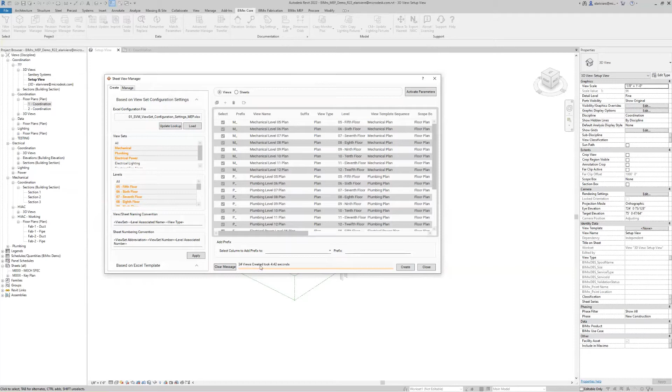I'm going to click create, and if we follow across the bottom, you'll see it created 24 views in only a few seconds. Now, I don't want to just stop with those views, because for each of those views we just made, I'm also going to need to have a sheet as well. So if we jump to sheets, we'll see all of those sheets ready to be created from the same views, the same trades, the same floors, ready to go. And just like that, I can create those 24 sheets.

Now, I'd like everyone to think, as I'm doing each of these steps, about the manual process or your current process for creating these things. It's a lot of right-clicking, duplicating, creating new, and renaming. It's an incredibly lengthy process. Now, I'm going to close this out, and let's go ahead and open up one of those views so we can see something that's about to happen.

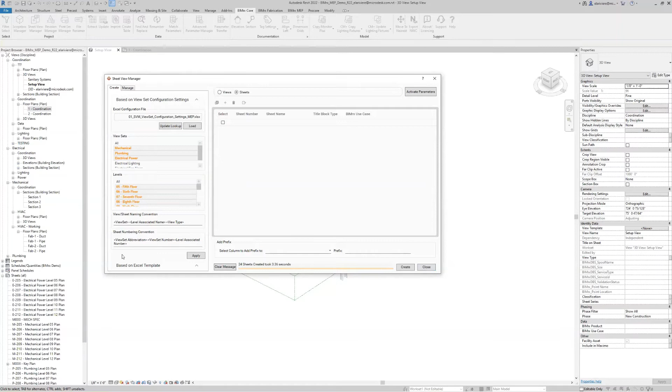Now, expanding out those HVAC floor plans, we see all of those tower views I just created. So jumping back to the Sheet View Manager, I don't want to just create overall plans. Really what I need is those individual tower plans, because there are two towers, not one giant floor.

So we can use another Excel-based workflow to duplicate those views for me. Loading in that view duplication Excel sheet, I've set it up for an A and B plan for each of the levels, giving me a tower scope box for each. We're not doing a view template because we're able to do this as duplicate as dependent. Think of the manual workflow of right-clicking, duplicate as dependent, renaming, and applying all of these different values for each view. I'm going to click create right now.

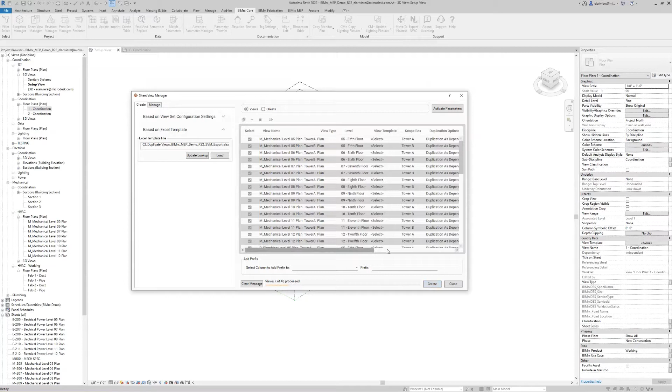And as we watch across the bottom, it's processing about 48 views in under 10 seconds, 6.21 seconds. Incredibly, incredibly fast.

Again, I don't want to just stop here. We've made them, we've got them duplicated, but I think we can do a little bit better. I think we can also place these views onto our sheets. So jumping in here, I'm going to click load and pull open a view placement Excel file as well. Taking a look at the placement Excel file, I have each of those plans called out, the towers I want on those plans, and I'm even giving them a location so each individual one will look the same. I'm going to click create, and let's talk a bit more about what's going on here.

I've set that placement location up so that each sheet will be exactly the same, and not just each sheet, but each trade within the model. Because this is an Excel-based workflow, even if we had multiple models, we could use these same Excel files, loading them into multiple projects, using them over and over to have perfect consistency across all of our trades. It's a very nice thing to have, and we're not doing anything extra. It just works that way.

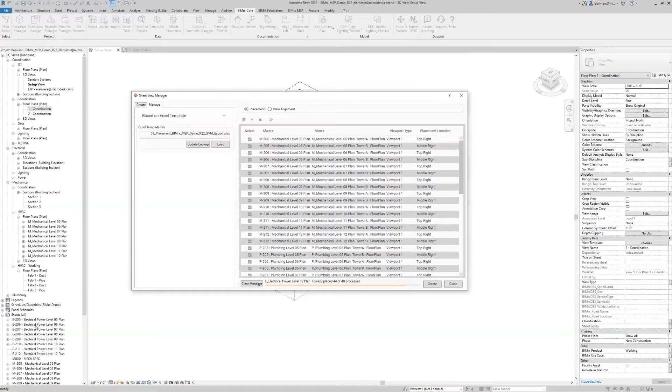Again, think about the manual process for doing these things. We would have to open each of these views up, drag and drop each of the two views we want on that sheet, and then manually align them to where we want them to be. It's an incredibly time-consuming process that BIMrx Core was able to handle in 43 seconds.

I'm going to click close and let's take a look at one of those sheets. And there we have it, those two views sitting right on the right-hand side, just like we asked it to place them. A very nice looking view. This is absolutely something that we could issue.

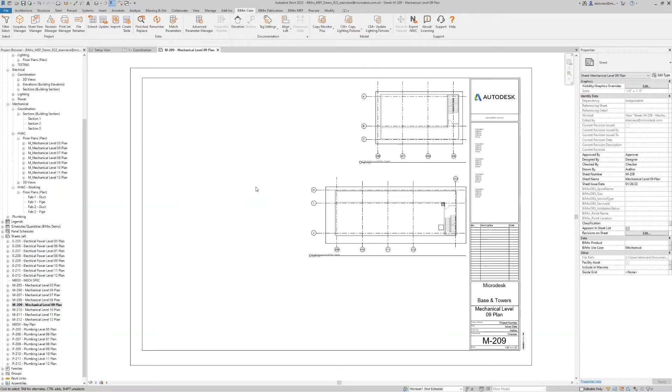So once I've set my project up, I don't really need that setup stuff anymore. I could issue a whole suite of drawings right now. But I think what I really need to do is jump in here and do a little bit more modeling. Not quite done with my modeling yet, need to do a little bit more of that first.

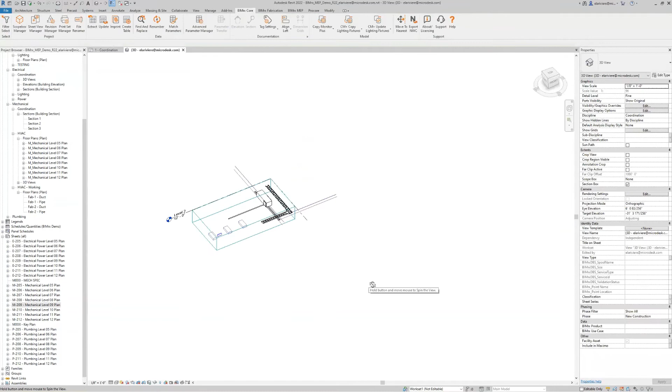So let's take a look at some of the new modeling things that we brought in with BIMrx version 3.1. Just like all the other versions, we can go ahead and work almost entirely from a 3D view. I'm going to tile these together so we can see what's happening in 2D and 3D at the same exact time. I'm going to use the bloom command on this piece of equipment over here to give me extensions that I can work from on all sides.

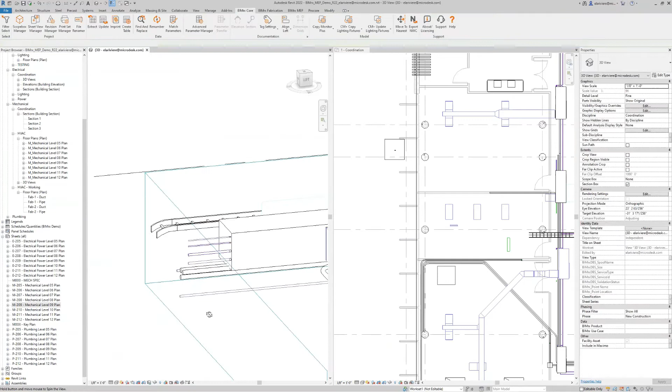We'll notice it's giving me an extension out for each of those pipes on the left there, giving me something to work with, hydronic supplies and returns from both of these, as well as giving me that sanitary kick on the other side and those two supply and returns.

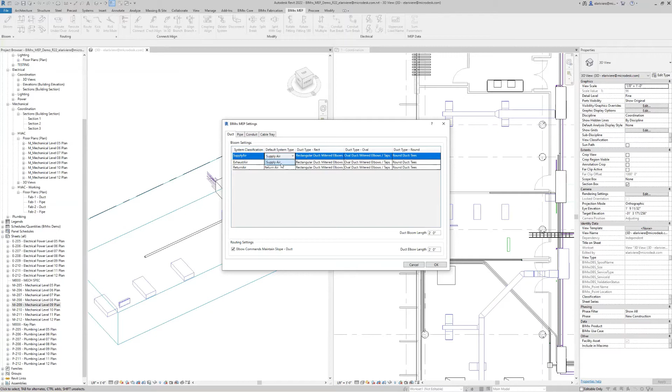Now, a really cool feature we've just added: if we go take a look at BIMrx MEP and open up the bloom, we can actually specify different system types if we want to. So if I don't want it to default to using miter, I can ask it to use something else instead. If I don't want to have it using supply air and I had another system available, I can do that. We'll see later when we start working with pipe work, maybe we'll want to change the sanitary around. So just remember this exists.

We also have the ability, if you'd like to change the extension length, to do so — you're not always getting 2-foot extensions. You can make that extension length whatever you would like it to be.

So I've got that 2-foot extension coming out. Maybe I want to go to 2D to drag this over, or maybe I want to do it in 3D. It's really up to me. But I'm just giving myself a little bit of a workspace to work with. Now I'd like to show you some cool things we have in here.

Let's say I need to connect all of these items together. Let's take a look at some of the commands that will allow me to do that. I have the align branch command. It's going to allow me to bring all of these up to the same height, and then I can very quickly bring them together.

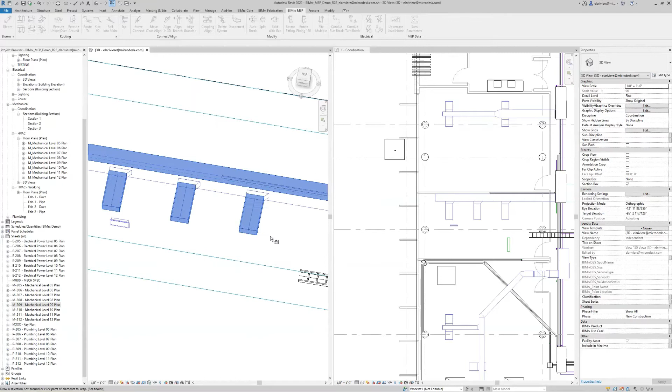If we go take a look up top, I've got align branch. I can choose my main, then my run, and it's going to bring it right up. I could absolutely keyboard shortcut these if I wanted to make it even quicker. So using that align branch command to bring all of these up, and then using the trim extend built into Revit to connect them all together, takes a couple seconds, and that's all good to go.

Now, an extra cool thing - even if those boots had come in the wrong direction, BIMrx MEP also has a flip multiple command, so we could flip these all at the same time, no more going one by one to make that happen. So I'm going to do another thing that's typically unheard of in a 3D view and make some copies of elements. I'm also going to wildly rotate this one with zero regard for what it's going to connect to, because I know BIMrx MEP is going to allow it to connect anyway.

So what am I talking about? I'm talking about the move connect commands. So I can use move connect to bring these items together and immediately get them connected. You'll notice tabbing through, it shows that full connection. Use move connect again on this middle item here, bring that through, you'll see it's inheriting systems and everything. These are real connections.

Now, what about that rotated one? Well, I can use move connect align to tell it, get rid of that rotation, rotate it so it connects properly, and we're good to go.

Incredibly fast. Now, in a little bit, we're going to take a look at some of the elbow commands as seen up here in a couple higher stakes situations. But I do want to remind you that all the commands we're viewing work on everything. So we can use the elbow commands on ductwork. We can use the move connect commands on conduit. It doesn't matter - these are all universal commands.

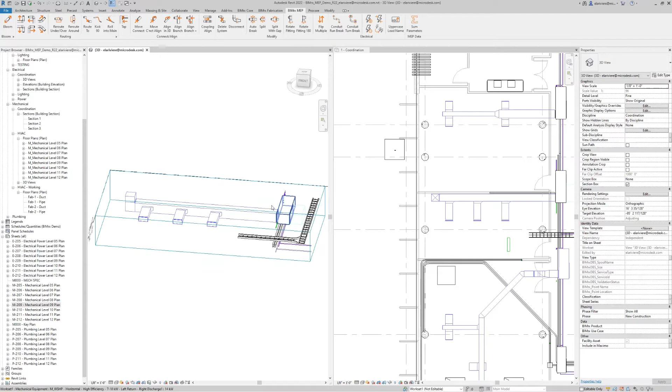So we've seen a little bit of that move connecting. We've seen a little bit of that bloom. Let's go ahead and take a look at some of the other nifty commands we've got. I'm jumping up here into this space - let's go take a look at what we can do up here.

Now, what I'm seeing is some stuff that's disconnected that probably shouldn't be, and some stuff that's clashing that probably shouldn't be. And if we look underground, we'll see some underground conduit that needs to get above ground. Let's go ahead and see how we can solve all of these problems.

So zooming into this central portion here, let's go ahead and take a look at the route to command. Now, route to has been updated to make it even easier to connect multiple items together. So what I'm going to do here is display a typical design option workflow. Maybe I want to try out a few different bends to see which one's going to look the nicest when I actually go ahead and run these things together.

And if it turns out I like 15 the most, awesome. I'm going to hit escape. I can control Z, Z, Z, get back to all of those things. And I can use route to again - that's going to maintain that 15 for me. And now I can just give all of these that 15 degrees.

Makes it very easy to try out multiple options and still know that you can connect them together very quickly afterwards. Now, we got that connected, but if we continue to follow this run, it just kind of ends.

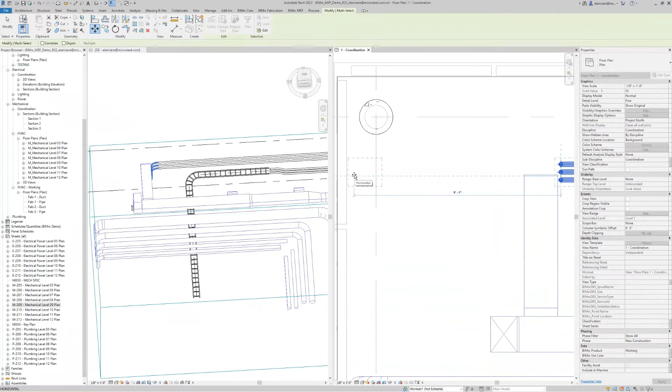And why don't we go ahead and take a look at 2D? I'm going to show you one of my favorite things to do with these elbow commands. I'm a huge fan of using the elbow down command in a 2D view to just drop my conduit, drop my pipe, drop my ductwork right where it stands. And then I can use the built-in move commands to move these right up against whatever wall or other item it is that I'm working with. Makes it very, very easy to model and coordinate in those 2D and 3D spaces.

So we'll see those sitting over here to the left.

If we take a look and rotate around, we'll notice that underground pipe isn't really lined up. So we're actually going to have to do a 90 over, and then we're going to have to bend up to connect.

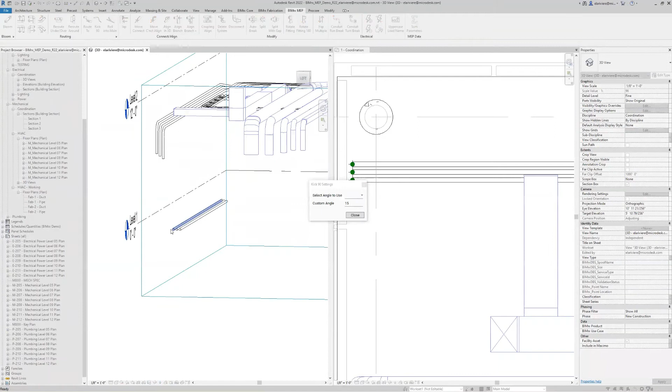Well, that is a built-in command with BIMrx MEP. We have this nifty kick 90 command that'll take care of this for us. So let's choose kick 90. All I need to do is choose the element that's going to have the bend, and click that. We'll see it's using that same 15 degrees from earlier. That angle works, so I'm going to just continue to use it.

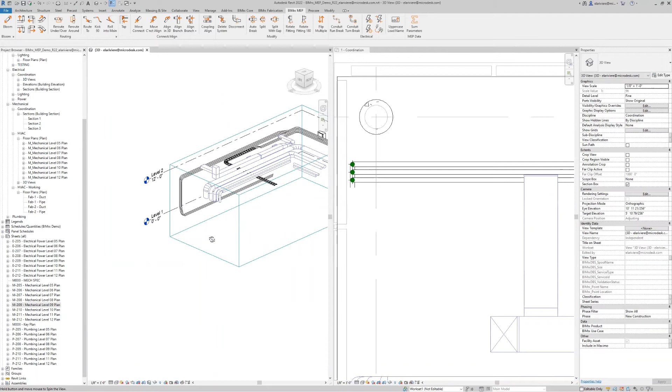Like we saw, I can just click item after item, and it's going to make that connection for me. Hitting escape when I'm done closes out of the command, and I can continue doing whatever it is I want to do. We're making it very easy to connect these elements together.

Now let's take a look at a couple other things we might need to do real quick. Let's clear a couple clashes. If we take a look over here, maybe it's not so easy to see where the clash is in 3D, so why don't I take care of it in 2D instead. I see there's something going on over here, and I'd really like to route all of these around and just not worry about it. So what can I do?

If I take a look, I can go ahead and use this reroute around command. I'm actually going to use the pre-select option here. Go to MEP, we're going to use the reroute around, and that's going to allow me - I'm going to use a 45 degree here - to push all those back.

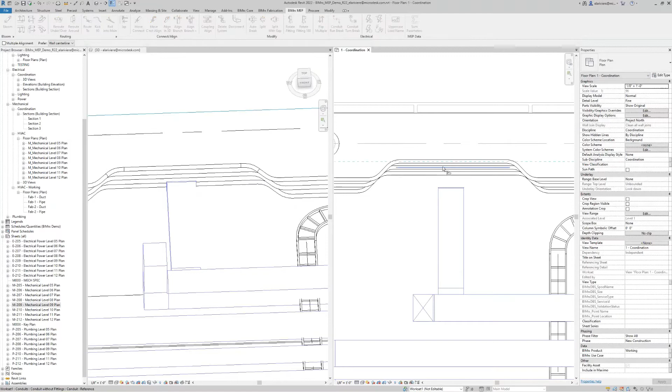I can then use the align command to just make it look a little bit cleaner, line all those up against a flat over there. Maybe they're up against a wall, something else, doesn't matter. And then they can break out and turn down after, right? Whatever you need to do, we're making it easier to do it.

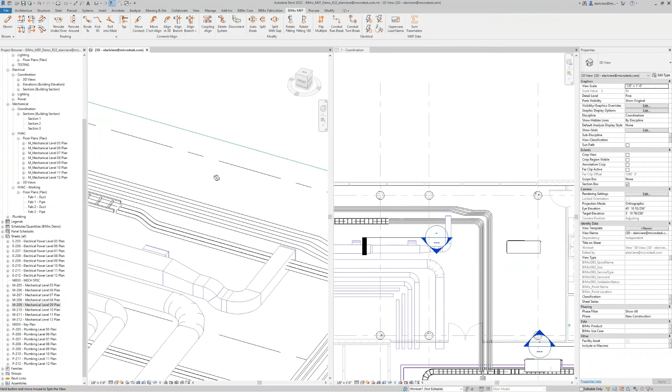Now that's getting us around something. What about if we need to get underneath something? Again, these all work in 2D or in 3D, whatever is going to be easiest for you. So why don't I do this one in 3D. I'm going to grab all of these conduit right here that need to get underneath that ductwork. We're going to jump right over to MEP, and we're going to use over under instead. I'm going to choose something on the left, something on the right, and I'm going to choose a bend that I think is going to work. I'm thinking 30 degrees sounds pretty good to me.

I'm going to click OK, and we should see it bend directly underneath. All it takes is a couple seconds. If I want to try something else, just like before, we can undo it and test out a few different design options. With all of these commands being this quick, this speedy, we can really dive into the design and not worry too much about the actual connections we're trying to make.

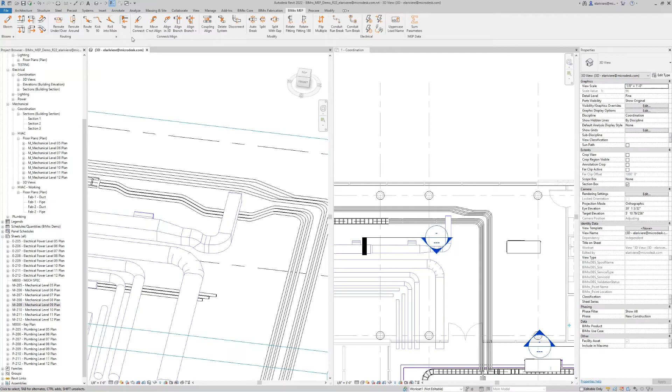So we've seen some cool routing, we've seen some cool stuff over here, but I'd like to show you something even cooler. Now, I think personally, my biggest bane when it comes to modeling is dealing with sanitary systems. So why don't we go take a look at how we can speed up some of this sanitary modeling? Let's do something cool, right? Let's do something extra cool.

So I mentioned before we have some new additions to Bloom. Well, let's go ahead and take a look at what those bloom additions are doing. If I bloom out that piece of sanitary, we'll see that it's giving me a standard sanitary extension, even though I'm actually attempting to use drainage systems instead. So what I would actually like to do is undo that bloom.

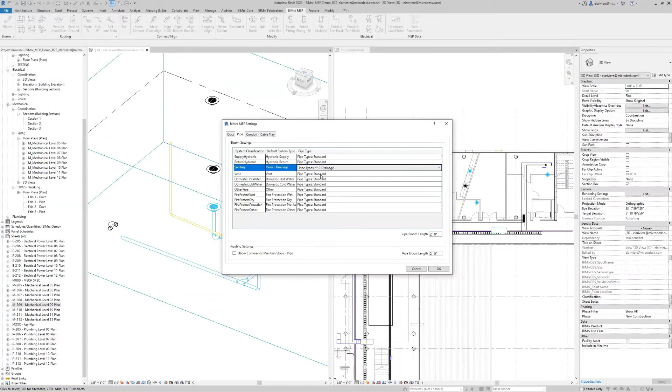And let's go take a look at some of the bloom settings, because I could actually tell my pipe, you know what, I actually want you to use plumbing drainage, and I'd actually like it if you use the P drainage pipe type. So now when I bloom this, it's actually going to give me the correct information. I can then use that move connect align we saw earlier to just bring my P-trap over, and it works.

I can then even bloom my P-trap out. And using one of the newer features to BIMrx, I can now pre-select when I go to use rotate fitting, and I can rotate an entire chunk of stuff all at the same time. So let's go use that rotate fitting command, choosing up here. And if I give this a 90-degree rotation, we'll see that it pops it over. I have RF keyboard shortcutted for rotate fitting.

And if you go the wrong way, it's that simple to just flip it the other direction, right? We can do entire chunks at a time. It's really awesome stuff. And what do I mean by entire chunks? Well, we'll see soon enough.

Now, continuing on with these workflows, what do I really need to do here? I need to finish up the rest of this run and give these things something to connect into. So what am I looking at down here? I'd probably like these to connect to the flat. So what do I need to do here? I need this to lower down to the correct height to connect together. We take a look, it's floating a little bit high.

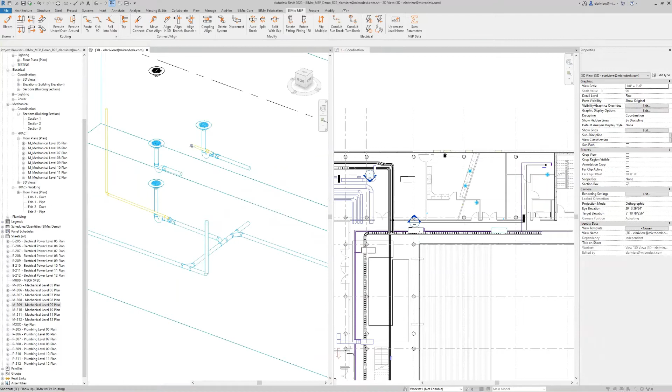Now I'm going to show you something extra cool. I can go ahead and elbow up this, and I'm going to elbow right it, or elbow left it as well. Now it's extra cool. Using the new command we have here, when we use align branch, we can actually do a pre-select of align branch. So when I grab this entire chunk of stuff, and now I go up to MEP and I use the align branch command, and I choose the main down here and I choose this branch here, you'll notice it moved it all as a group. So we can actually align groups of elements, not just a single element.

Now I'm going to undo this, and I'm going to use align branch with just these two elements. And I'd like you to see that that vertical piece is going to stay exactly where it is currently if we don't do the pre-select. So again, going up to that align branch, choosing the main down here, choosing that run, you'll see it does an extension right here instead. We're giving you as many opportunities to design what you need to design as possible.

So now that I've brought those down to an acceptable height, I can use trim to bring them together. I can go ahead and grab that fitting, extend it out. I'm going to bloom this one as well. I'm going to give it an elbow up, and there's my cleanup. That was incredibly easy, right?

Incredibly easy. Now, same thing I can do over here. I want to get these connected. Well, align my branch together, bring it down, and I can connect them. But wait, Ed, you never put a slope on that. You're right, I didn't. Well, if we use align branch plus, we can cause it to inherit the slope for us. And it now has that 1/8 inch slope. So when I go ahead and do that connection, it is sloping in and everything is fine and dandy, right?

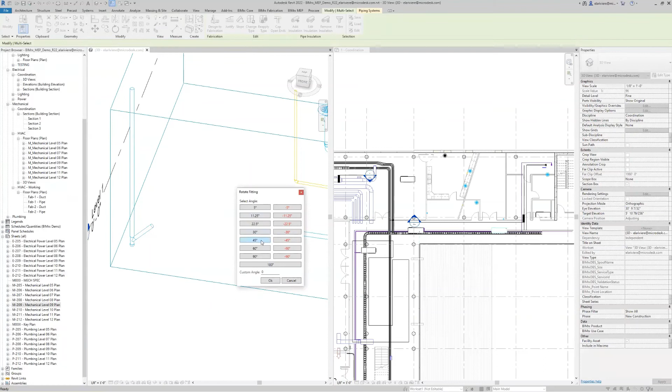Really nifty stuff. Now, let's see some other things we might need to do here. I've got more of this system to connect together. How else could we string some of these commands? If we take a look down here in the bottom left, I've got this little riser coming up off my main. Well, I could grab that. I can use rotate fitting here to come across the item over here. Maybe I want to rotate these down 45 degrees. I'm doing a 45-degree rotation here so that when these come together, I get that 45-degree bend dropping in. Now, what's incredibly tough to do is to move this vertically to line up with this so they actually make that connection.

Well, just like we did over here, align branch pre-select is an incredibly powerful command. And it's going to allow me to grab this entire chunk of elements. And when I go ahead and I do this BIMrx MEP align branch, and I choose my branch and I choose this to align up to it, you'll notice it moved only in the Z axis. We are not editing any other axes, and it's moving it as a chunk so it all moves together, allowing me to create that perfect trim to corner connection with no issues whatsoever, right? Really awesome stuff, really powerful stuff.

Now, let's keep going with it. I'm going to go ahead and drop down an extension over here. I'm going to make a copy of this little chunk of stuff over here. I'm going to move it kind of close, I don't know, because I don't care. I'm going to go ahead and let move connect and bring these together.

Once those are brought together, I'm going to grab that chunk of stuff. I'm going to use rotate fitting on it. I'm going to bring it around 90 degrees. I'm going to go ahead and bloom that extension out. We'll notice because the other part was already sloped, we're getting that 1/8 inch slope over here as well. We take a look, that one's sitting a little bit above. Now I'm going to lift it even higher above.

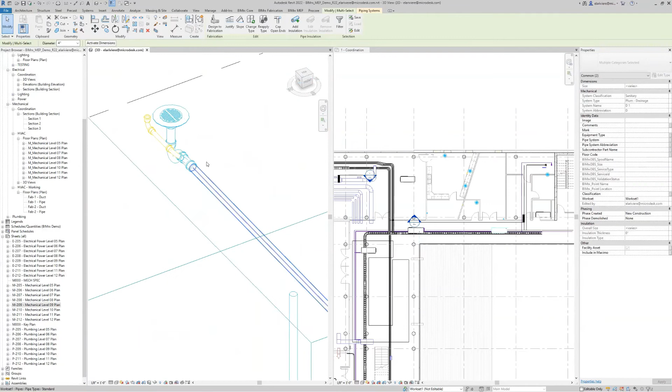Again, I can grab this entire chunk of stuff over here and use Align Branch Plus to bring the entire thing down to exactly where I need it—rather, Align Branch Normal. Line those up, and then I can use Trim to Corner to bring these back together again. And I have a rolling offset with a 45-degree bend.

We can make some incredibly complex shapes with only a few button clicks. It makes it that much easier to work with all of these elements.

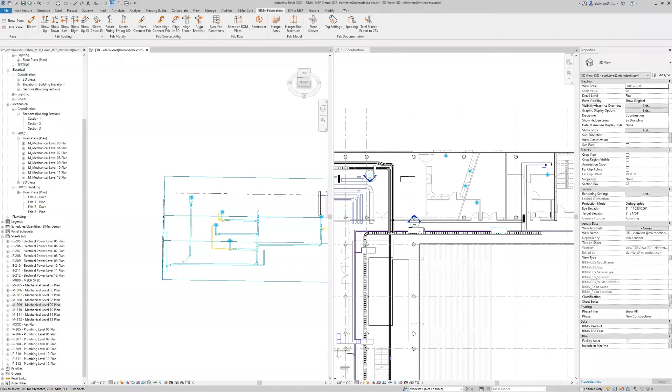Now, it doesn't just stop with this 3D modeling. I want to show you guys a little bit of that electrical modeling as well. So jumping down here into this space, I'd like to show you some of what we can do with electrical and a little bit of documentation and tagging at the same time.

I'm going to swap to medium so we can actually see some of those tags pop open. So what do I mean by tagging? Well, if we jump into Core, we actually have some cool tag settings.

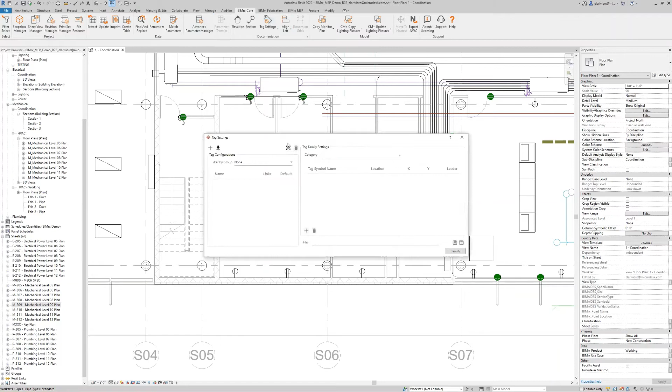If we open up those tag settings, I can load in a settings file. Well, I have some electrical fixtures that need to get tagged over here. So opening up that electrical fixture tagging and clicking on it, we'll see that it's giving me a device and a panel tag. All I have to do is select some elements, and it's going to place those tags down for me—really nifty stuff.

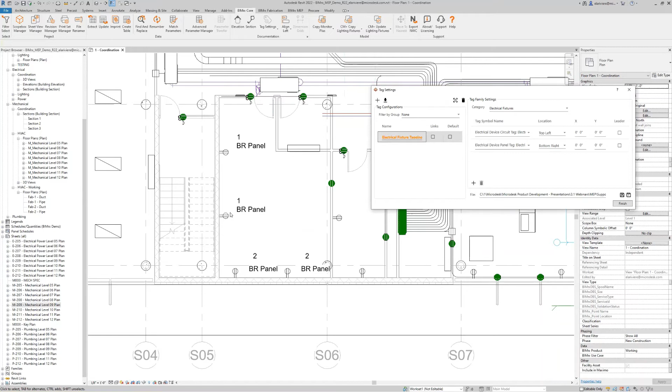Imagine doing this across an entire sheet all at once, and your entire sheet has been annotated for you. Awesome stuff. We'll notice we can even edit the locations if we want to, and we've even given you some basic locations to start working from.

So I've done some tagging—maybe we did the whole project, cool stuff. But maybe I need to edit some of my circuits. Well, if we take a look inside BIMrx MEP, we've got some really nifty circuit modifying commands. So what do I want to do?

Maybe I want to add something to a circuit—maybe I need to add this to this. All I need to do is select the element I care about that's on the circuit I want, click Add to Circuit, choose another element, click Finish, and it's been added to the circuit. Wow, no menu diving, no panels—it just works.

Cool stuff. Well, we've got the equivalent for Remove From Circuit. So if I just wanted to get rid of something and I don't want it on any circuit whatsoever—oh, there we go. Let's just remove that off of the circuit. Good to go, fine and dandy. Reconnect it to whatever you feel like.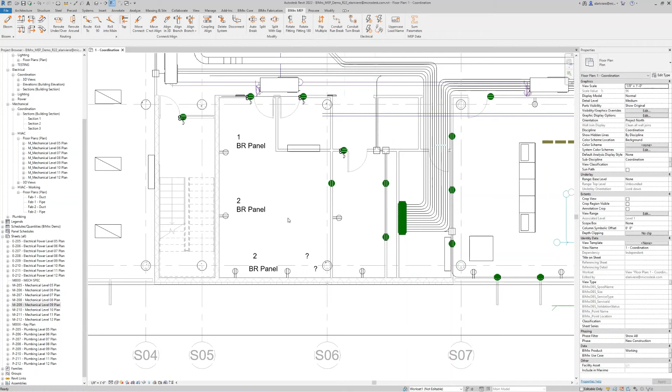Now, I'm going to undo that—I do want to leave that connected. So I'd like to show you something cool that's going to happen next.

So we also have this really nifty Copy Circuits command. Copy Circuits is an incredibly powerful tool when you have repeating floors. It's asking us to go look in an elevation view, and if we go to an elevation view and select a panel, we can go ahead and use it.

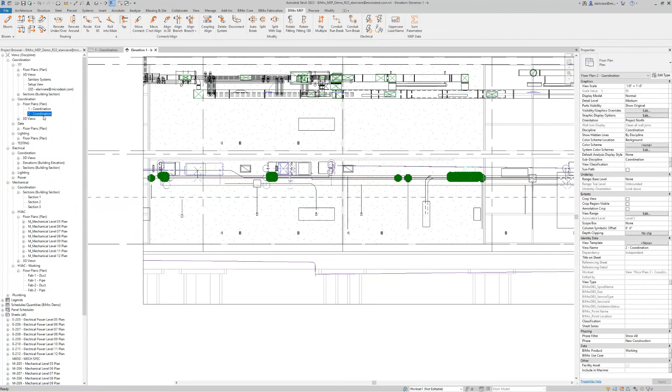We can use the BIMrx MEP Copy Circuits command to take that panel and copy it from level to level, bringing every connected element with it. And not only is it bringing every element, it is bringing them with their connections. So if we jump back up and take a look at Level 2, where I just copied this to, here are all of those items.

If we jump straight back to Core and do that same tag settings—there it is. I'm going to tag these so we can take a look.

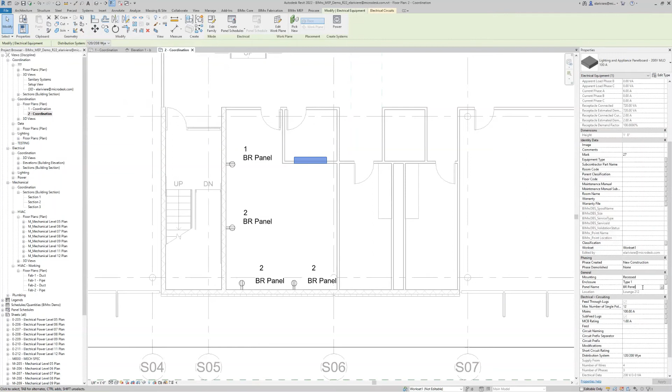We get those same panels showing, right? Now, the one thing it did do, it maintained that panel name we saw on level 1. All I need to do to get a slightly different name is give it a slightly different name. So I name it -2. We see -2 showing up on all these. Jump back to level 1.

This is awesome stuff. We can copy entire data centers, level to level, bring it up. We could go through and do entire levels of hotels, right? This is an incredibly, incredibly powerful command.

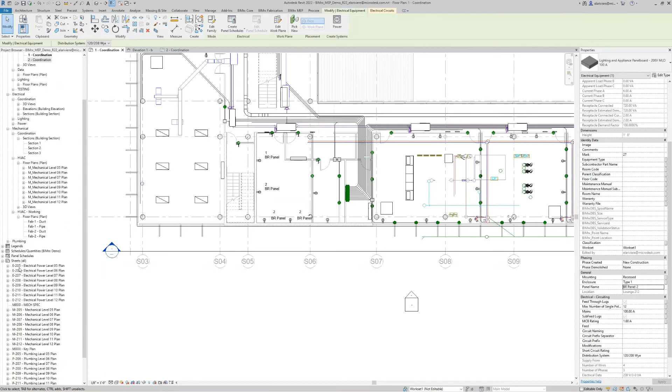So we've seen a little bit of that documentation with tagging. We could tag some other stuff, or I can show you a little bit more documentation. So what's something we do deal with a lot of times? I think we deal with having to bring some random spec sheet someplace, get it on a sheet and print it out. So there's not a super easy way to do that out of the box. So what did we do? We made an easy way to do that. We've got the Imprint command.

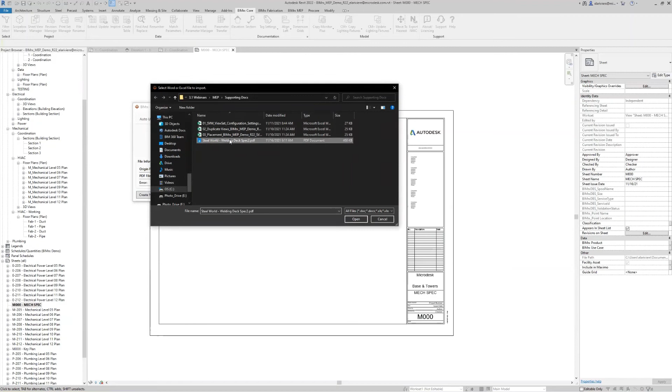Imprint is allowing us to load in, and I'm just going to click create new here. It's allowing me to load in Excel files, PDF files, whatever I really want. I can load it in here, choose the pages I want to have loaded, and it's going to create those for me on the sheet I'm looking at and just place them down.

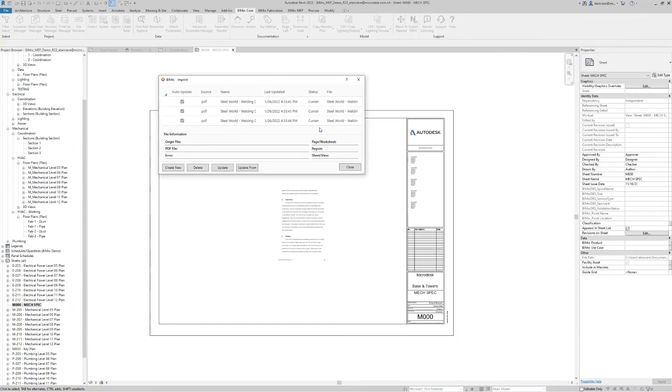Now, what's really cool about Imprint is if I set these to auto update, when I open up my project, when anyone opens up Imprint, it's going to just update these from whatever the file is that's sitting outside Revit. So you can make updates to that file, set this to auto update, and just understand that your Revit project is always going to be up to date with whatever file is up to date, that you are linking in. Clicking close, and we'll see each of those 3 pages sitting right down here for me, ready to use.

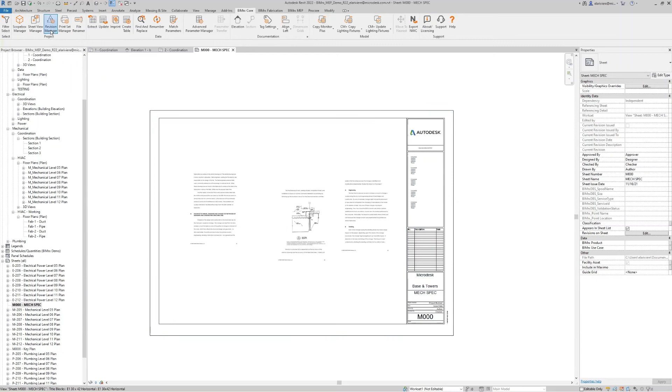So I've made a bunch of sheets. I've added some settings. I've done a bunch of detailing. What's the last thing that really needs to go on? Well, maybe I want to get some revisions sent out. Maybe I want to set up some print sets. So maybe I decide that floors 5, 6, and 7, maybe these are all part of a revision set. I can go ahead and assign them all to a revision set right here.

Now, what's extra cool is if I have a bunch of revisions already assigned, I can even filter to only view the ones that I want. Once I filter, I can even grab them and right within the same window, create print sets for them.

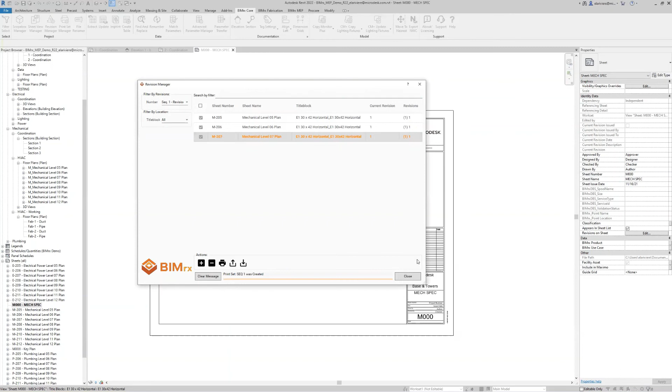And if I've made some print sets, done some other stuff, I'm good to go. I can close right out of here. I could also go to my print set manager and view any other print sets I've created, like a BIMrx print set right here. Or if we jump to sequence 1, we'll see that I could go in here and I could choose even more sheets or views to add to this print set, right?

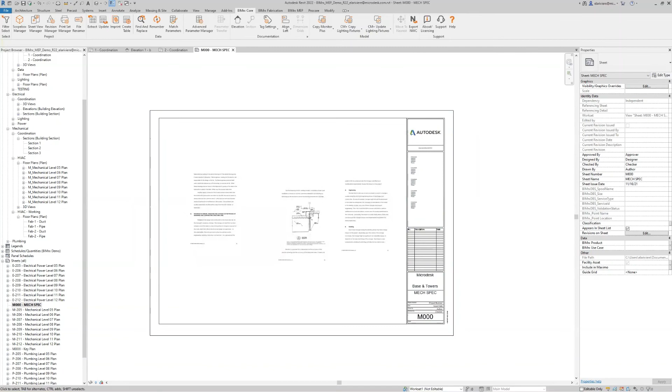It's incredibly powerful stuff. Now, why is that print set manager so powerful? Well, I'm about to tell you.

One of the most amazing additions to BIMrx is the integration of Core and Cloud Manager. This allows for the export of PDFs and NWC files from the Revit model on daily, weekly, or monthly basis. Now, I just showed you how to create those print sets with BIMrx Core Revision Manager. With Cloud Manager Pro, we can take that print set and automate the export of PDFs, either on demand or on schedule. This integration opens up the possibilities for even more ways to automate your workflows. So this webinar is part of a series, and you should absolutely catch the Cloud Manager webinar.

Now, let's just take a quick look at some of those time savings, right? Huge reduction in project setup, huge reduction in documentation, and really the modeling is going to speed up as much as you want it to speed up. The more elements you need to modify, the more time you're going to save with BIMrx. The real question is how much time are you wasting by not using it?

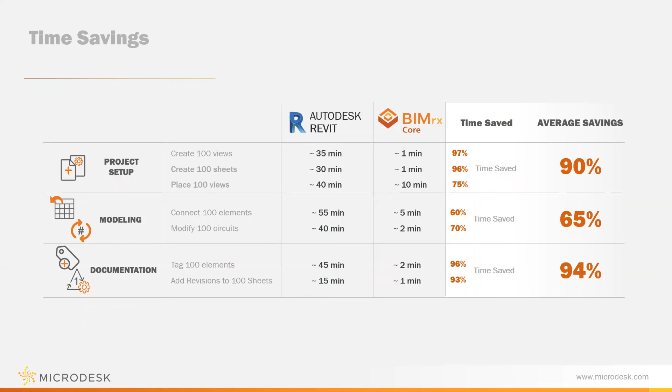I want to remind you that BIMrx includes even more incredible commands and features than the ones we just saw. They're there to automate project setup, model management, and documentation. I'm certain you benefit from not just one, but many of the other features listed here. And I hope you got a small taste of what BIMrx Core and MEP can do for your project teams.